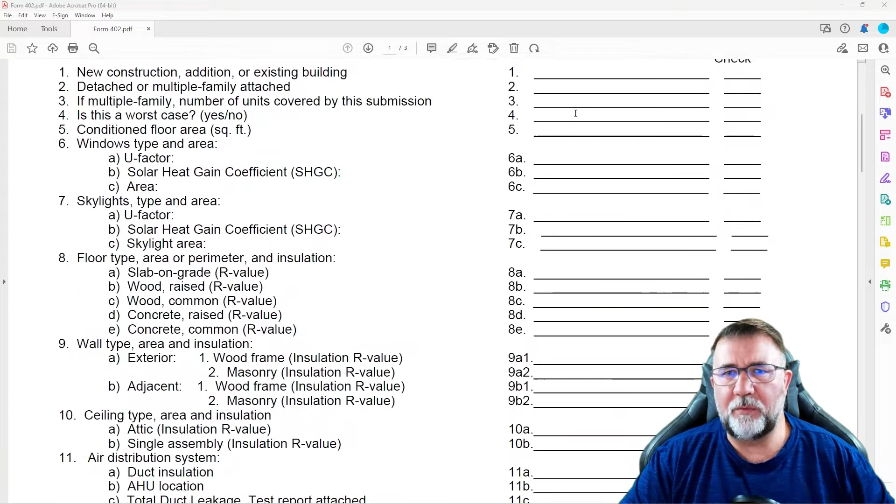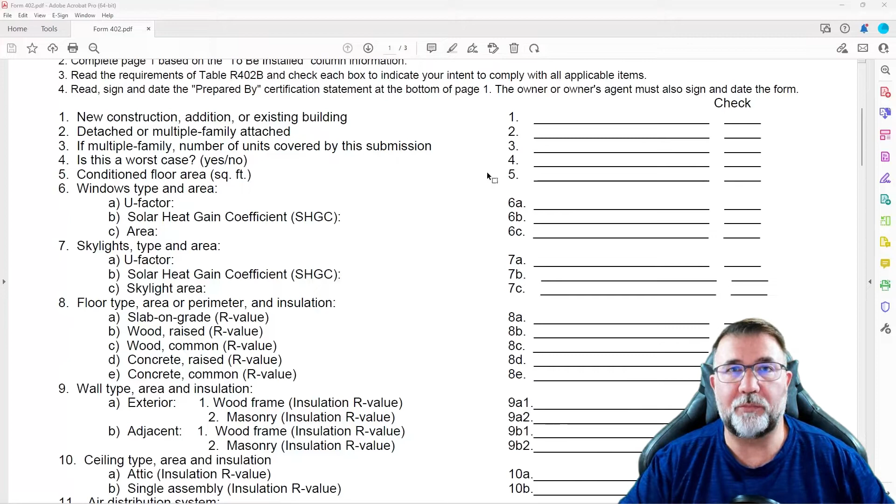Now, this prescriptive method could technically be done by hand, but you would have to do all the calculations behind the scenes. But there are a lot of different softwares that we use that, once we do the calculations, automatically put all the information in the proper spaces. So this is the section here that gets filled out, and we sign this, and the owner agent signs it. But here are what the requirements are.

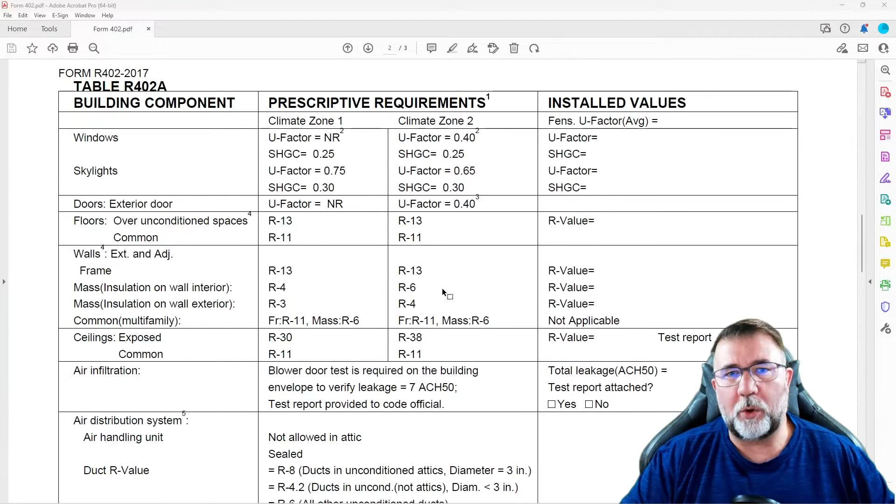And here's the important thing, the difference between the prescriptive method and the performance method. Now, what they have is what they call, not the test houses, but a reference house. So virtually they have this reference house that has all of these individual items that you see here that must be met in order to pass the energy calculation. Now, with the prescriptive method, each individual item stands alone.

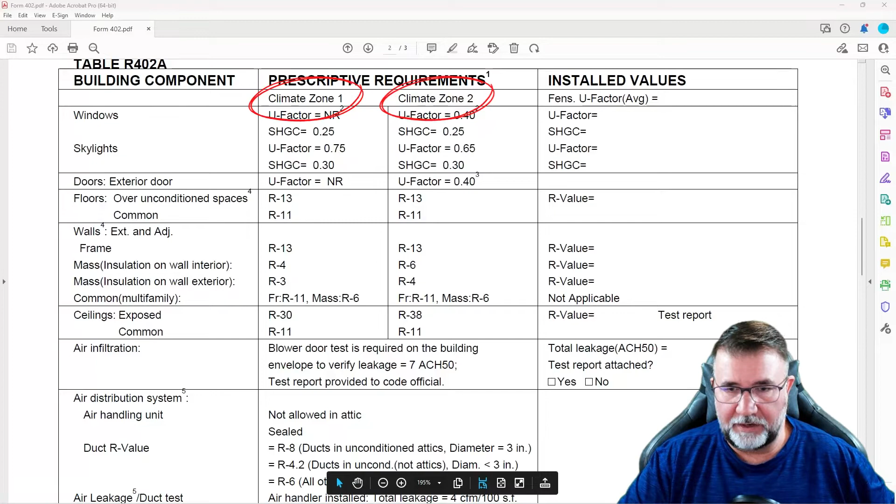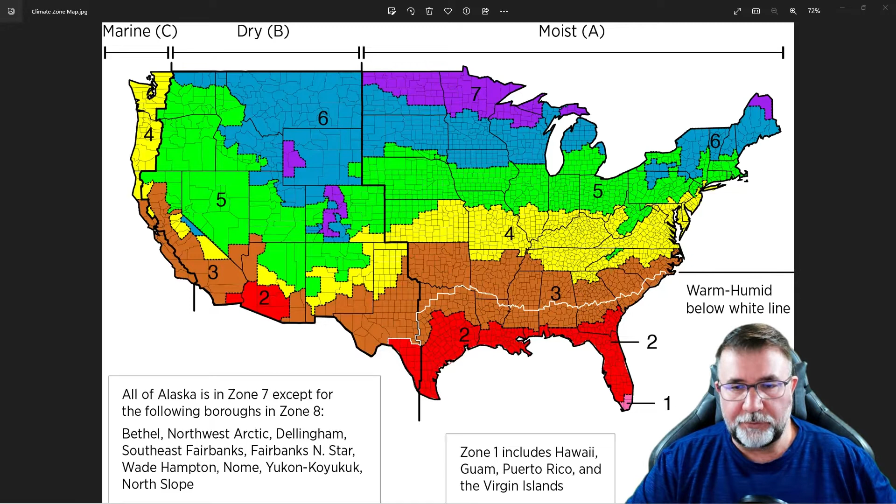Now, let's get back to our, there we go. So what those are going to do is they're going to dictate. And when I show you later what website you can go to find these things, that'll help you to better understand. So you can see here for climate zone 1, climate zone 2. So when we're looking at the windows, if you watched one of our previous videos, we talked about the U factor and the SHGC, which is the solar heat gain coefficient.

And you can see here in climate zone 1, they don't really care about the U factor. And why? Well, the U factor, as we talked about in one of our previous videos, is more of the insulation value, how fast the heat goes in or out. And when we're in the warmer climates, we're not as concerned about that. We're more concerned about the solar heat gain because we're closer to the sun. As you can see here in climate zone 1, which is way down at the bottom, we don't really care about that.

But we do care about the solar heat gain coefficient. So when we look at these things, you can pull these up and you can actually Google it and see Form 402. And when I show you the website here, there's the table. All this stuff is on tables, very easily free for you to access.

But in the prescriptive method, the code says that the window must meet these specific values or lower, better insulation, and in this case, the U factors and SHGCs, the lower the numbers, the more efficient. So this 0.4 here, if it was a 0.3, it's more efficient. SHGC, it says 0.25 here. If it was a 0.20, that's more efficient.

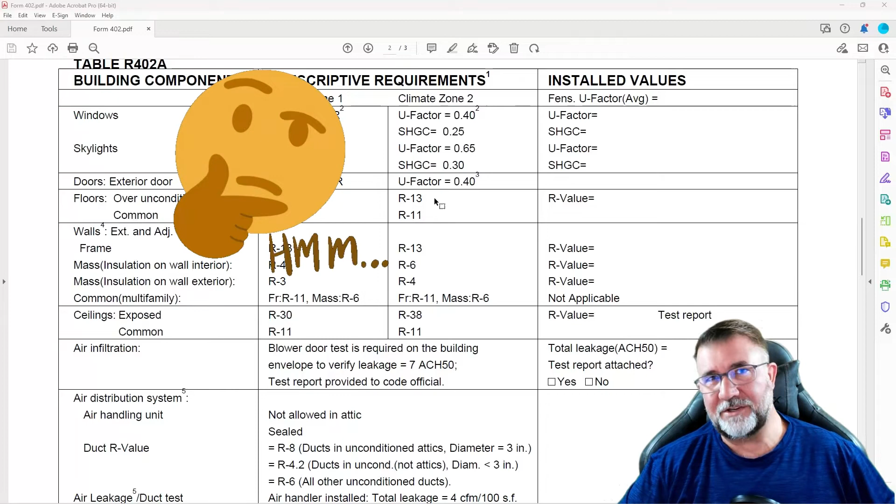Now, some HVAC design companies out there will not ask you for a lot of information. They'll go with just some basic things. You're not really paying attention. You go and build your house, you might get your permit at the beginning and you think everything's all hunky-dory, and you build the house, and then the inspector comes out and starts looking at the energy calculations when you get close to the CO and goes, well, wait a minute, hold on. Your energy calculations say that you need R13 and you only put R11 in.

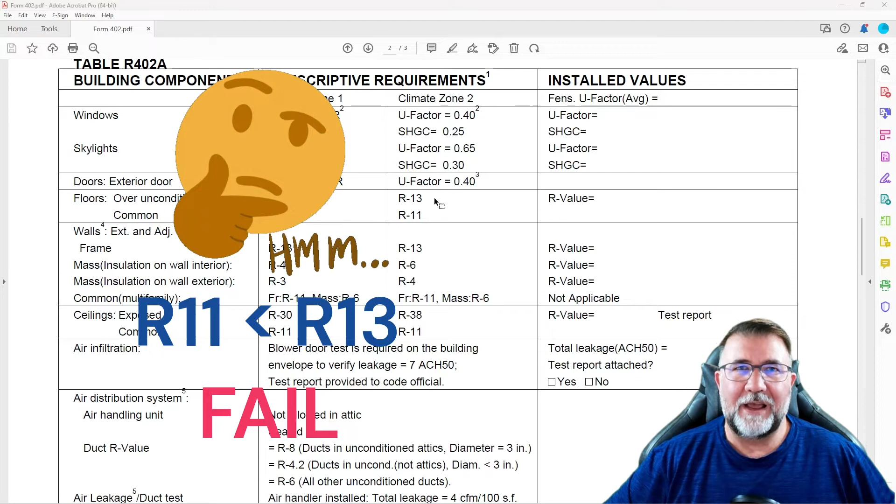Can't do it. Well, what are you going to do? You've already built this structure. You already got the walls up. You already got all these things done, and you only put R11. You're going to have to go back and make a big change because it's not going to pass with R11. You have to have R13.

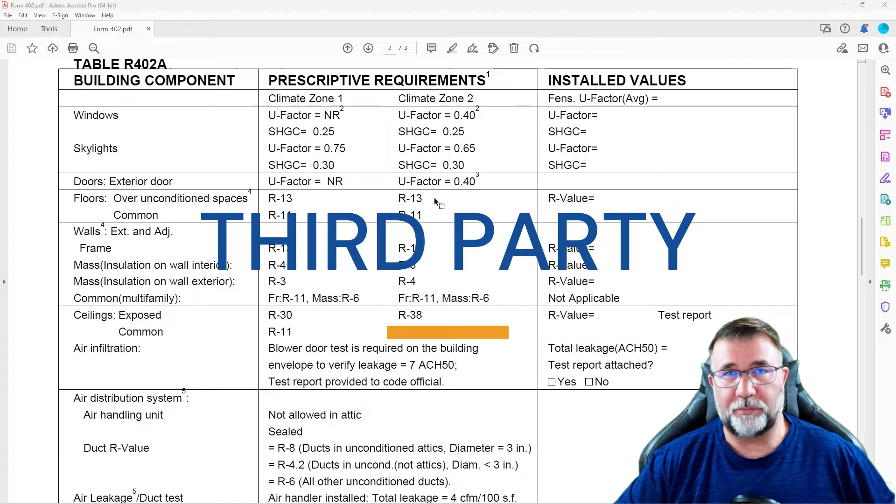So it's very important which HVAC design company you're using, and I strongly recommend you use a third party. Do not use your HVAC company because they're not always as up on the codes and the changes and the values. And I know this because we deal with a lot of HVAC companies at ProCalcs, and many of them have no clue. I'm not saying there's not some out there that are really well versed, but many of them do not have a clue as to what goes into this.

So when we're looking at these values, your frame walls versus your mass walls, which would be like a block wall. Then obviously the frame wall, 2x4, 2x6, 2x8. And these values must be met. And this is a big one here in Florida, this R6 for your block walls. Now, if the insulation's on the interior, which in Florida it's always on the interior, I don't think I've ever seen a house where all the insulation is on the exterior. But notice here, if the insulation is on the interior of the block wall, you have to have R6.

Now, here's something that you really have to be careful about, and we run into this constantly. In fact, the team teases me here at ProCalcs because I constantly do training videos on clients putting on the form that we ask them to fill out that their block walls are R7. And our team would just take their word and go, okay, so you're saying your block walls are R7. Yes, block walls are R7. Well, then what happens is we do the design, we put it at R7, the building inspector goes out there and it doesn't match what's actually at the home.

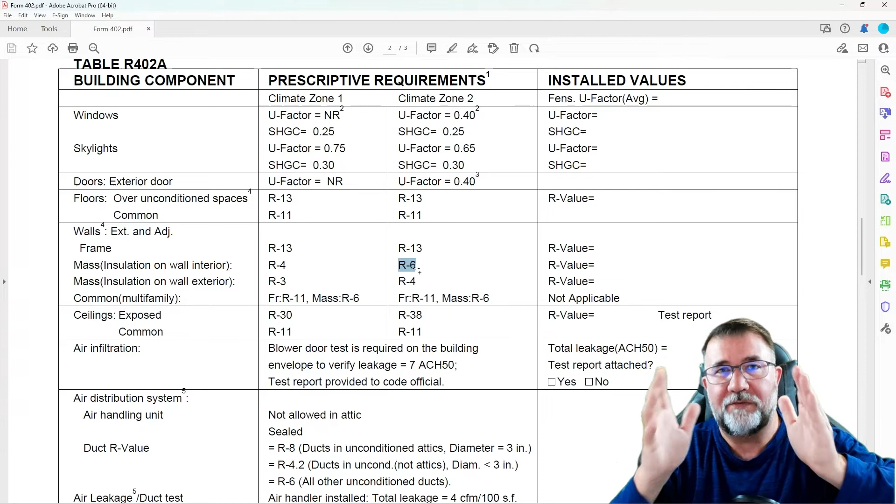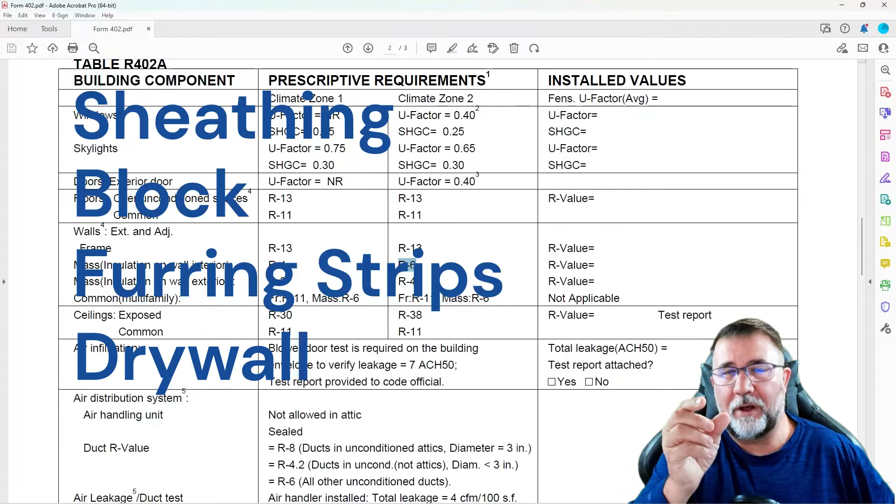When it comes to energy calculations, all the basic building component values are already factored in. What the building department is requesting is the additional insulation that is being added. So if I have a block wall and a little bit of sheathing on the outside, I have the block wall, furring strips, drywall, air gaps, and that all does have an R value to it. But that's not what they care about. They want to know, are you adding an additional R6 of insulation to that block wall?

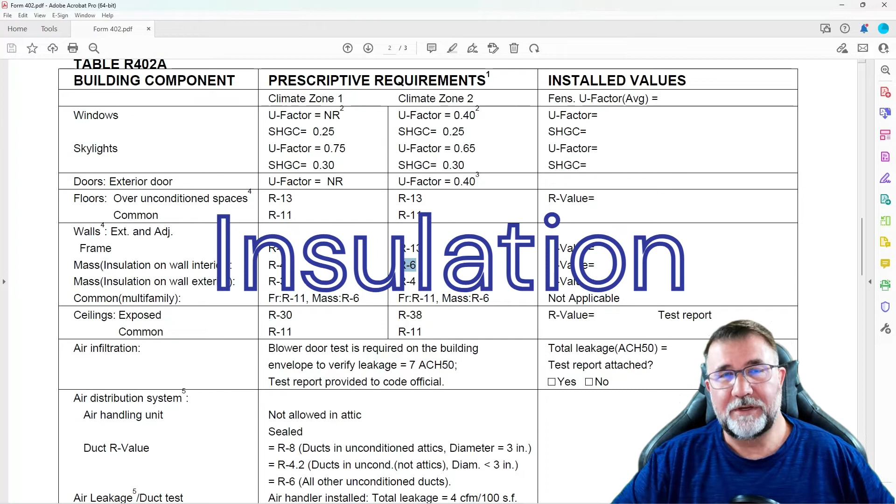Depending on the type of insulation you use, that could be a 1-inch foam board, it could be spray foam, it could be regular batt insulation, it could be different things. But if that is not an R6 value, with the prescriptive method, it fails. So that's the tough part about the prescriptive method.

Now, let's show you where we're going to find the different codes for your state. They're all free, right online. So here is the website that you're going to go to, codes.iccsafe.org. What you want to do is come here on location, click, and find your state. So let's go ahead and go to Florida.

So now when we go to Florida, you're going to see all the individual building codes. Let's scroll up here so you can see behind my fat head. You're going to see the main building code, residential, protocols, high velocity, accessibility, all different things. But the one we want to focus on is the energy conservation.

Now, in just about every state, let's click on Alabama here, it's going to look a little different, but they're all going to have that term energy conservation in it. So let's go back to Florida. Now, what you can do here is filter. You have to check this: current adoption. There we go. So we know that we have the right ones. We're going to want to go to the energy conservation one.

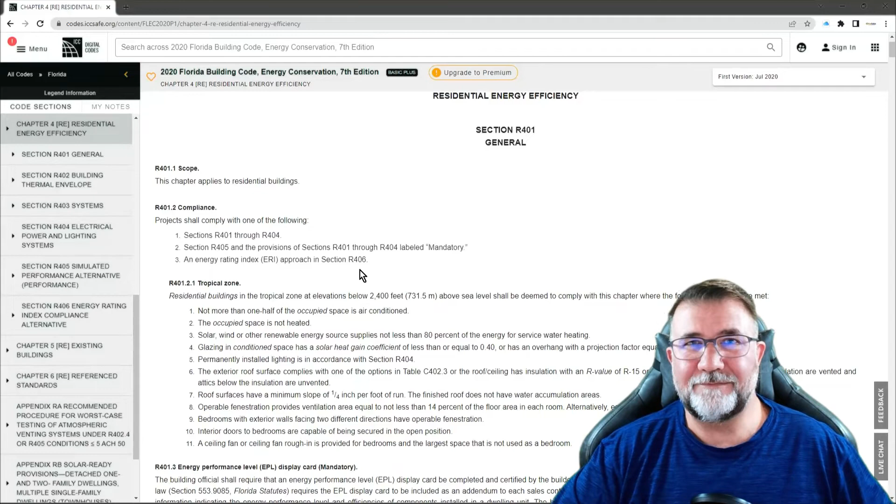We tend to think that because somebody's got a fancy name badge, a uniform, or a license on the truck, they know what they're talking about. I don't. I guess we can call that ignorance, because if we blindly follow somebody just because they have a title or a license without doing our due diligence, shame on us. The information is out there. And I would venture to say that most of the professionals you may deal with aren't quite as professional as you think. So CYA.

So when we go down this here, you're going to have tables. Here's our first table. When we showed you the back of that prescriptive method, we were showing you the SHGC for the windows and the U factor and different things. Well, here it is right here. Here is the actual code that you would go to. Here's all the different climate zones.

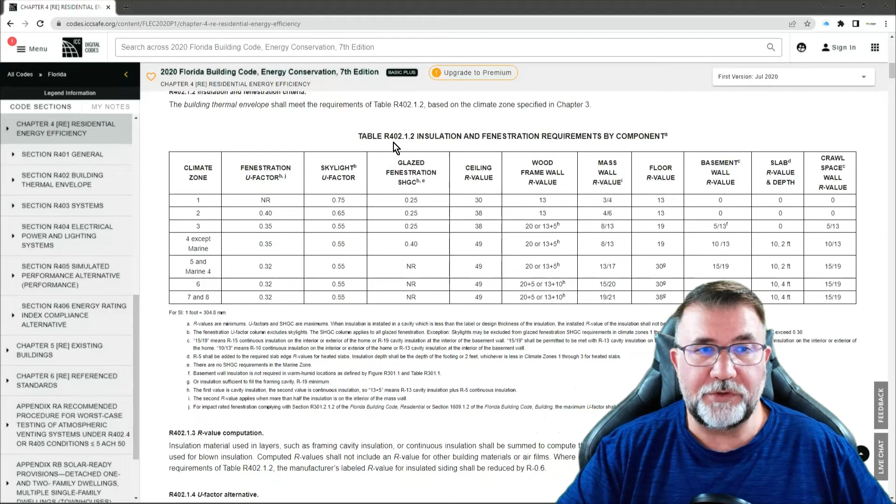Even though this is Florida, they're still pointing out the climate zones because a lot of these tables and codes are the same throughout the states that adopt the prescriptive method. They may have some different wording and tweak some things here and there, but overall they're the same. This is a great place to look when you're doing the prescriptive method on your home.

Now, the struggle that people have with using the prescriptive method is how stringent, how strict the requirements are. It can require you to spend a substantial amount of money more to build the same house. And then there's the performance method, which we're going to talk about in one of our other videos.

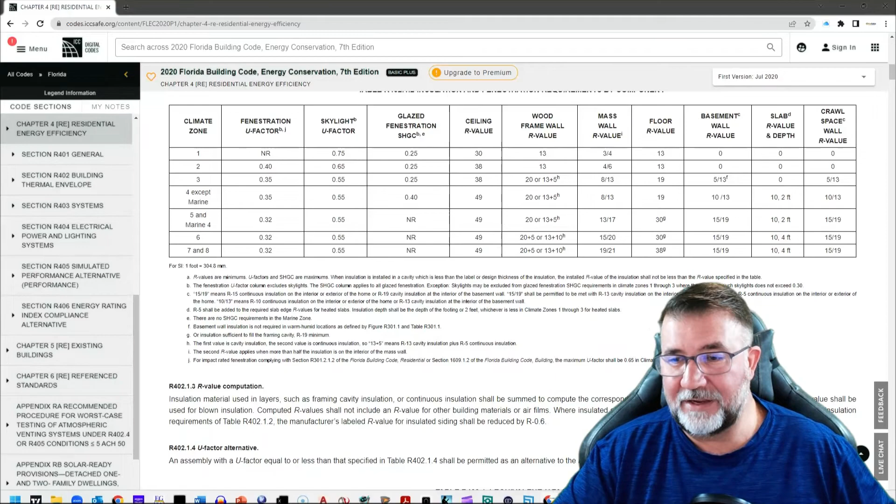Let's go back to the Form 402 and look at some of the things here that really get people. Right here is one of the biggest things: air distribution system, air handler unit. Where is it located? It is not allowed in the attic. At all.

The ductwork. If ducts are in unconditioned attics, they must be R8. R8 insulation in some areas is pretty much impossible to get. You're going to fail. Because if I go in with R6 and I'm supposed to have R8, everything else in my house in the prescriptive method may be perfect, I will fail.

Air leakage duct test. If the ductwork is not in conditioned space, you have to have a duct leakage test. A lot of people don't do that. It's not that expensive to have a duct leakage test, but it also must be sealed within a certain number or value. Otherwise it fails.

Here's another big one, especially in Florida. Heat's not a big thing until you get into northern Florida. Yeah, we have a couple cold days here and there. For some of you folks listening, a cold day to you is like negative 25. To us, a cold day here is like 40.

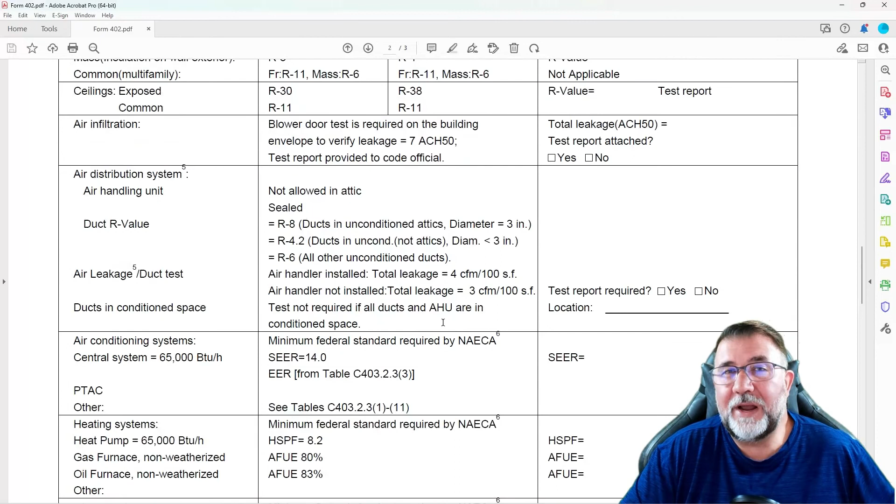Now, here's one that gets me. In Florida, climate zone 1 and climate zone 2, when you do a blower door test, which is mandatory on every new construction house, not on renovations, the amount of air infiltrating your home can be up to 7 air changes.

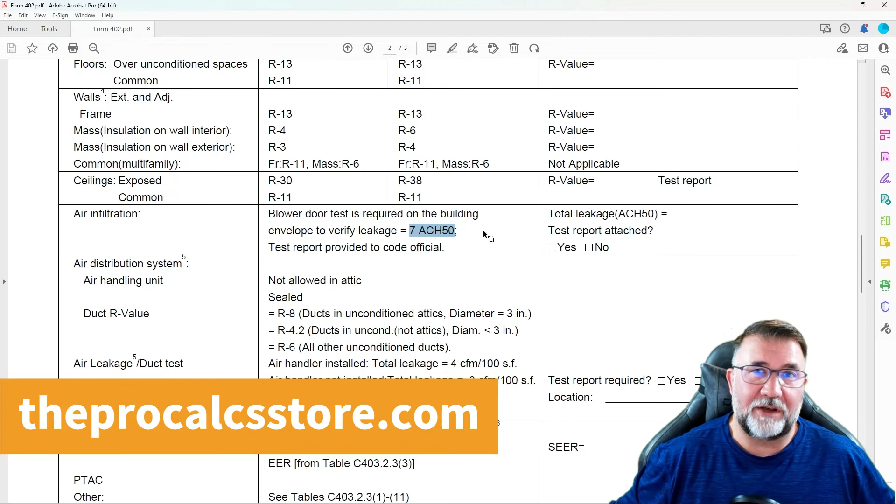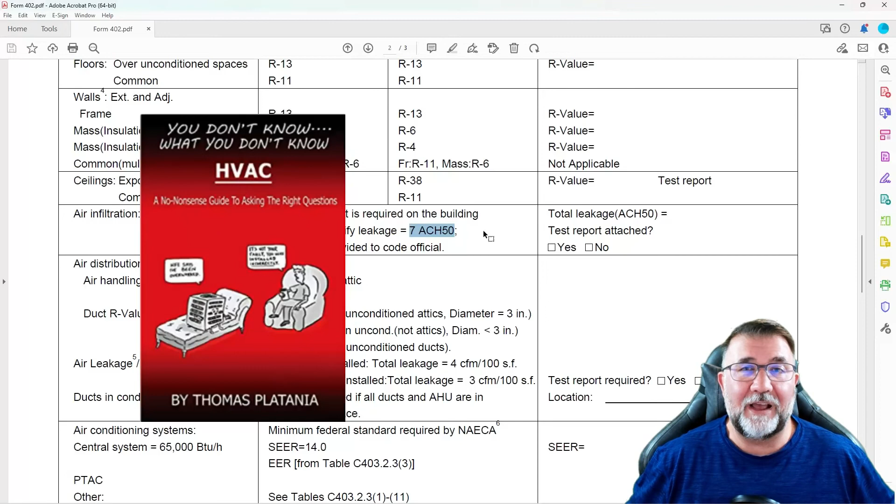So the prescriptive method is a very complex, very detailed, very stringent code that in Florida most of your houses aren't going to pass because of how strict it is. Air handlers can't be in garages. They can't be in attics. They have to be in conditioned space. All ductwork has to be in conditioned space, and if it's not, it has to have a duct leakage test. So a lot of complexity to it, but that is the prescriptive method.

In our next video, coming up soon, we're going to be talking about the performance method. And in the video after that, we're going to be talking about the different software that you need in order to perform the energy calculations.